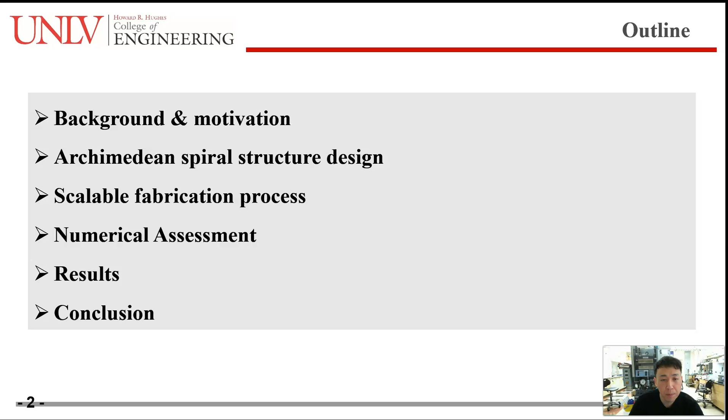Here is the outline. At the beginning, I will show you the background and the motivation, and then we go to our proposed structure design, which is Archimedean spiral structure design. After that, I will show you the highly efficient fabrication process. Based on the well-designed structure, we surely did some numerical assessment and real-world experiments. In the end, we will have the results and conclusions.

So, as we all know, the solar energy is the primary source for the lives on the Earth. But for some situations or in some places, the solar irradiance is reduced. Species living in such an environment have developed a strategy to harvest the insufficient sunlight in some ways. Here are some examples. The eye structure of moth is sensitive to the light, and that enables the moth to find the light easily in the dark areas.

So inspired by the moth, people duplicate its eye structure and try to find out the mechanism inside. If you look at the structures, they basically contain the parabolic nanohemispheres, which give us a gradual refractive index decrease. The bottom left is the figure we published before. The structure is inspired by the viola flowers. Combining with the graphene and PDMS, the ARC showed broadband anti-reflection properties when we have the angular incidence.

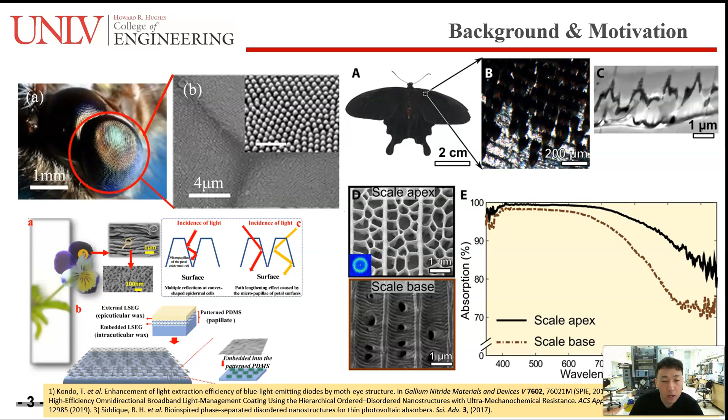The top right figure gave us macro and nano structures on black butterfly wings. The macro-scale ribs support many disordered nanoholes. The diameters for these nanoholes are different, ranging from 215 nanometers to 385 nanometers. These suspended nanoholes give us a ring-shaped fast Fourier transform, and that combines the efficient light coupling and the light trapping properties together with a high angular robustness.

So, in our project, inspired by sunflowers, we have a chance to utilize their structures to further improve our devices. There are many studies on the sunflowers. For example, people found the golden ratio in their seed arrangement, and it is related to the Fibonacci sequence. If we use one of the Fibonacci numbers and divide this number by the one before this number, the ratio is close to the golden ratio. So the Fibonacci sequence is also called the golden ratio sequence.

However, to perfectly duplicate its structure is really hard. So we first duplicate the whole structure and marked them as dots. These dots are arranged by a golden spiral. And then we simplify these dots. Finally, we found that the position of these dots were actually spread out by a single spiral. So we can conclude that the spiral can give us the benefits as follows.

It can help the plants to have sufficient sunlight during the plant growth. During the plant growth, it offers the least material utilization and the lowest energy consumption. Other studies also show that the structure of the sunflower also has a good structural tolerance. The most important, it can improve the light capture capability, which is good for the solar devices. But like what I mentioned before, it is hard for us to build up a nanospiral arrangement in reality.

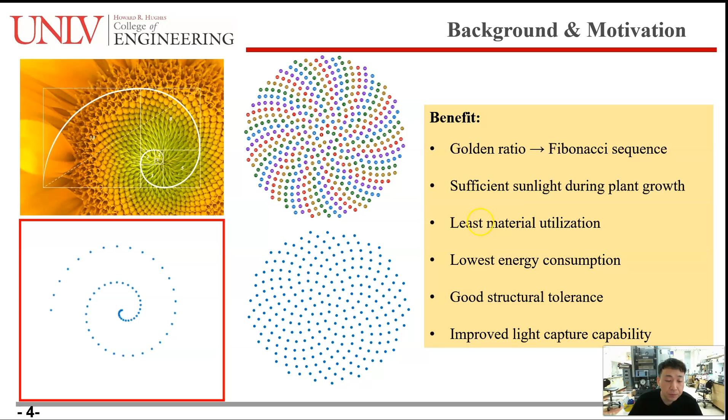Luckily, we found that the nanostructure formed inside an optical disc follows a spiral track from inside to outside, and this track is technically called Archimedean spiral. This spiral is actually what we want. It provides us an efficient way to fabricate the spiral-shaped nanostructure, and what's more, the writable disk is used to record the binary data and the digital information we want to burn into. And this function actually gives us a chance to bridge the Fibonacci number we found in the sunflower and the nanostructure we designed.

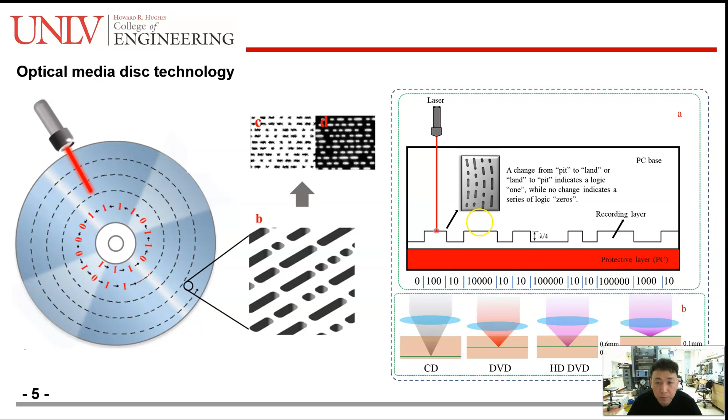The figure D you can see there is actually the SEM image in the recording layer, and we also call this kind of nanostructure the pit-land form. It actually gives us an idea. We can program our well-designed sequence, and we can transfer this sequence to a binary sequence. After we transfer this sequence to the binary sequence, we can burn this binary sequence into a disk. Meanwhile, the newly formed sequence follows an Archimedean spiral.

So, because we found the Fibonacci number in the sunflower, we choose the Fibonacci sequence. The Fibonacci sequence begins with S1 equals 1. According to the concatenation rule, the first 6 generations of the sequence go like this. To be noticed, the sequence is an infinite sequence, and it can help us to extend the pattern size no matter how big it is. Also, programming the binary data will enable us to get the exact patterns we want to get. So in this project, because we use the Fibonacci sequence, the pattern formed by the Fibonacci sequence is called Fibonacci pattern.

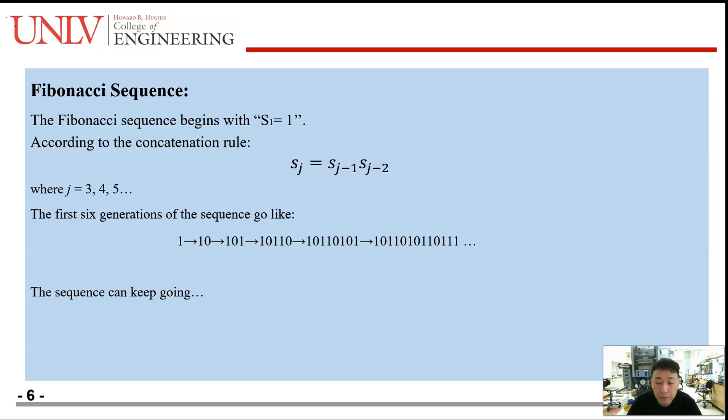And it is important for us to determine the nanostructure size. We call that the nanostructure features, or the geometric parameters. For the pit-land form, we can determine the pit size, the depth, and the track pitch. Using different disks such as CDs, DVDs, and Blu-ray will give us the different sizes of the nanostructure.

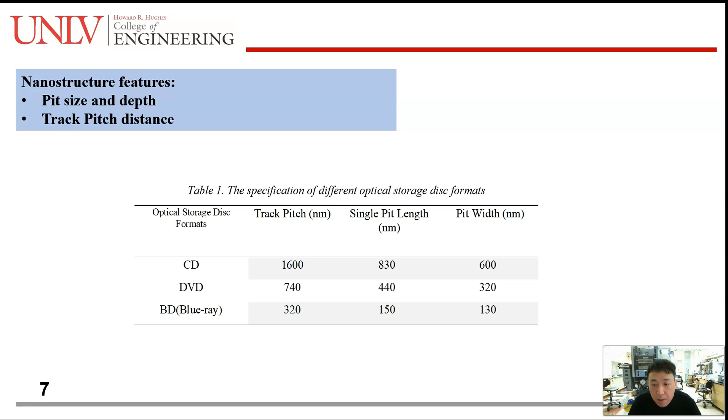And here is a table you can see there. The Blu-ray is around 150 nanometers pit size, and the DVD is around 440 nanometers. So we can determine our nanostructure features by using different disks. To find out the optimal disk for the light trapping capability, we did the reflectance simulation, and here is the figure.

In this figure, the patterns are the same, which are the Fibonacci patterns, but the pit size, the pit height, and the track gap are different due to the different disks we used. Compared to other disks, the Blu-ray gave us the highest improvement on the reflectance decrease, so we chose Blu-ray disks as our mold to fabricate our coatings in this project.

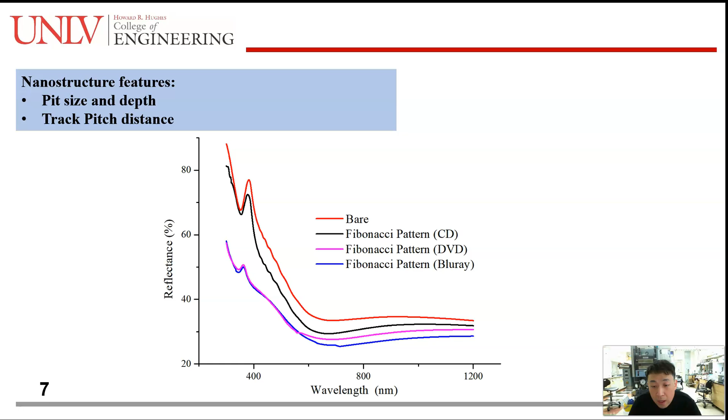To be noticed, the disks only determine the nanostructure features, such as the pit size and the pit height, but the locations of the pits and the lengths are determined by what binary data we burn in. For example, in this project, we use a Fibonacci sequence, so the pattern will be the Fibonacci pattern. But if we use another sequence, such as the Rudin-Shapiro sequence, the pattern would be the Rudin-Shapiro pattern.

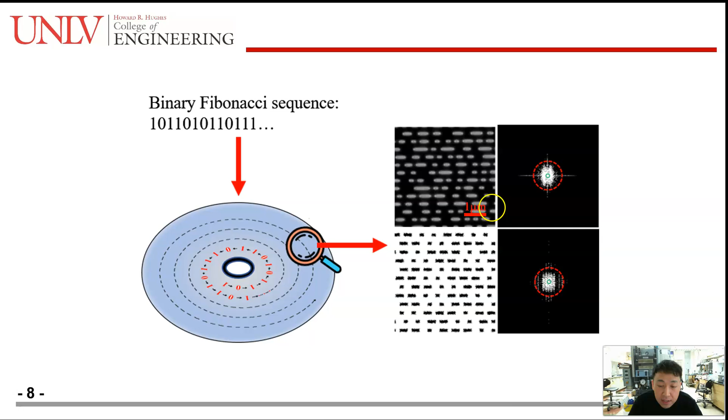Here is a figure to show how the binary Fibonacci sequence is burned into a disk, and you can see the right side figures show the nanostructures taken by the SEM, and also our simulated figures. And you can see that the fast Fourier transform shows no big difference between the SEM image and our simulated Fibonacci pattern. Also, we did the power spectral density function to show our pattern has a broadband spectral power density. And here is the figure you can see there.

So once we determine the pattern, the rest is to transform our pattern to the real world. Remember, we have already burned the pattern into a disk. Then we can peel off the protective layer of the disk, and the nanostructures are actually located in the recording layer. We can use this recording layer as our mold to fabricate the anti-reflective coating. Because our proposed ARC is arranged by a spiral, and the pit-land form follows the Fibonacci sequence, we call our coating HLTSC, as shown on the right figure.

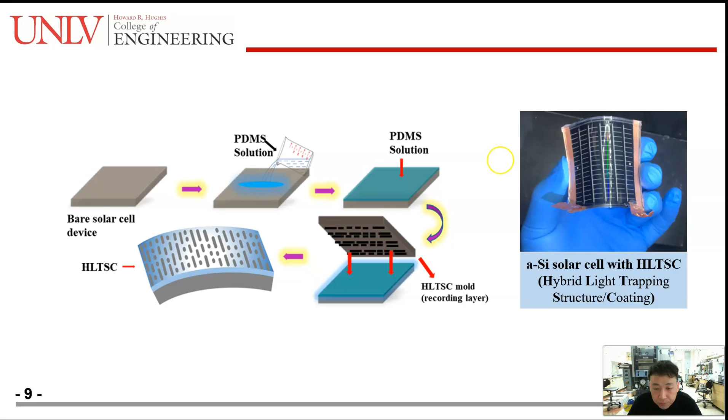To fabricate the HLTSC, we use the PDMS solution. The procedures are like this, and the right figure actually is the demo of our HLTSC on commercial silicon solar cells. Of course, we did some experiments to test our coating. Before that, we did a numerical assessment.

Remember, our pattern is designed based on the Fibonacci sequence, and its arrangement follows an Archimedean spiral. So we want to test how the Fibonacci sequence and the spiral affect the light trapping capability. So besides our HLTSC, we also made a coating including the Archimedean spiral only, which is just the spiral, without cutting off the spiral by the binary data. It is easy to make one. We basically do not burn any data inside the disk, and the recording layer in an empty disk is a perfect mold for us.

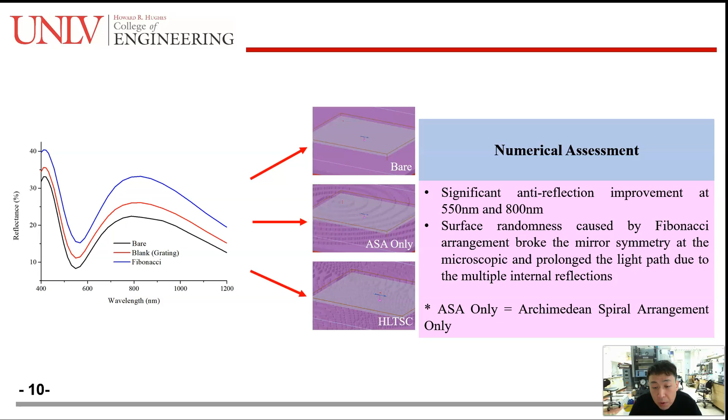And you can see a significant reflection decrease happened at 550 nanometers and 800 nanometers. When we burn the binary Fibonacci sequence inside, we improve the surface randomness, and the surface randomness breaks the mirror symmetry at the microscopic level and also prolongs the light path due to the multiple internal reflections.

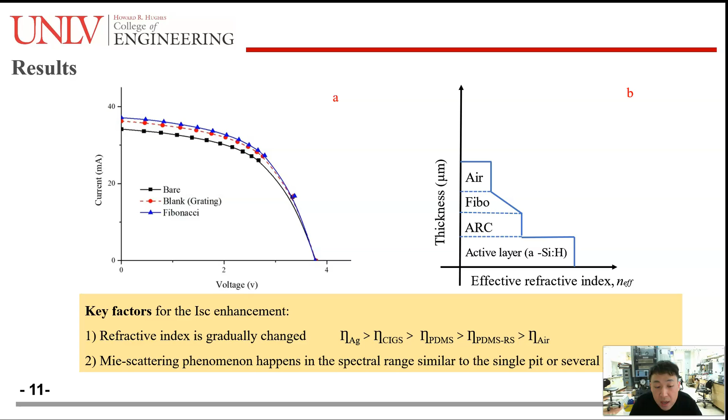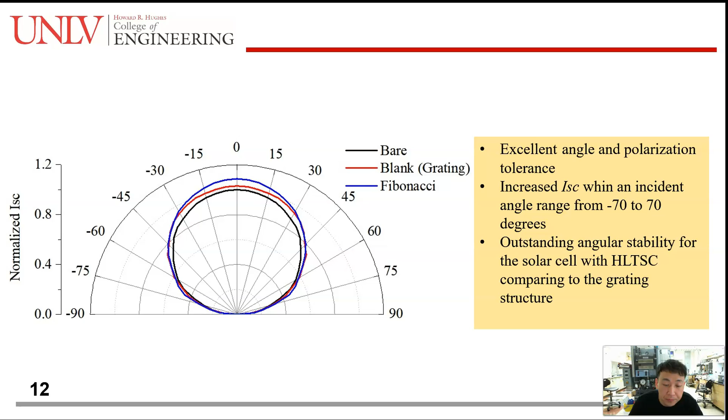So we finally draw the conclusion. A highly efficient HLTSC is proposed based on the merit characteristics of both the Archimedean spiral and the Fibonacci sequence arrangement. The FDTD simulation and the optical experiments are conducted to verify the concept. And a cost-efficient manufacturing method is also provided for HLTSC. The results give us improved efficiency on solar devices and show an excellent surface anti-reflection property.